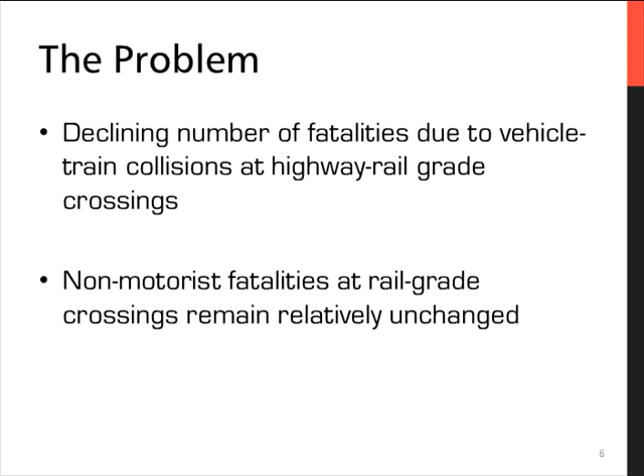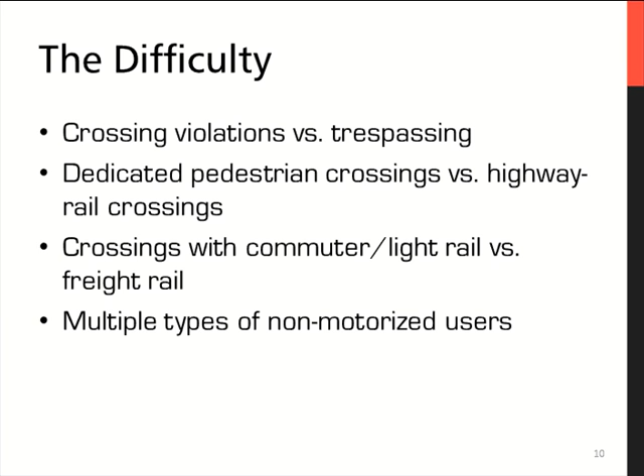There are differences in crossings that serve exclusively pedestrians versus crossings that are on sidewalks adjacent to the highway. There are also crossings that have commuter and light rail, and crossings away from urban areas or in urban areas that serve only freight rail. Also, we have multiple types of non-motorized users. We have people pushing strollers with little kids, people on skateboards, sometimes even equestrians, and of course people with disabilities. And all these different user groups would require different types of countermeasures to advance their safety.

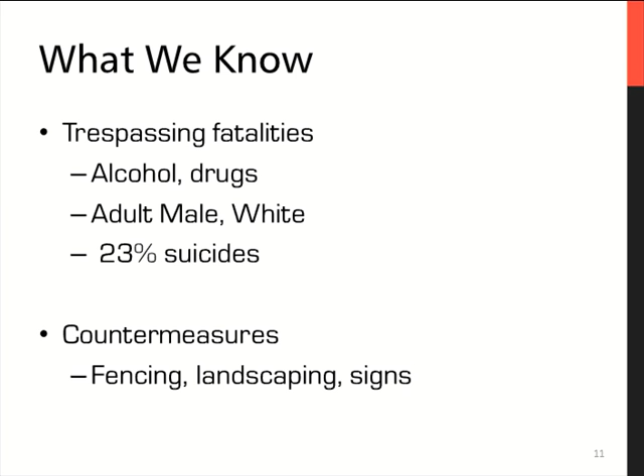What we know from the literature is that trespassing fatalities involve alcohol and drugs, more frequently involve adult males and the white population, and about a quarter of them are suicides. And as a countermeasure, we have used fencing, landscaping, and passive warning signs. As far as warning devices, we have found that active devices seem to reduce risky behavior, as measured, for example, by the elapsed time between the activation of the device and the time of arrival of the train, and also the time that the pedestrian is entering the crossing.

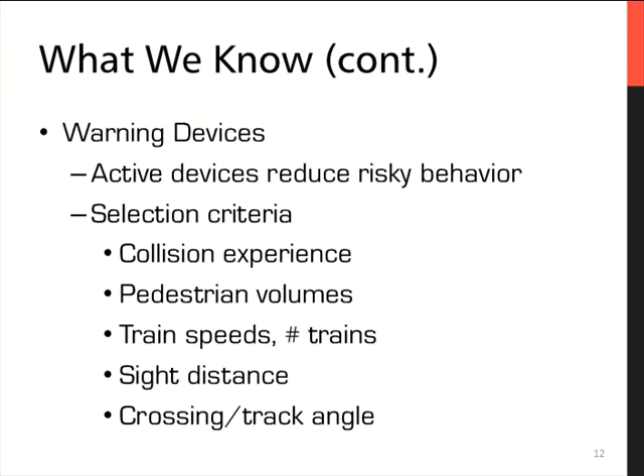For selection criteria, we have used the collision experience; for example, crossings with higher numbers of fatalities receive priority. Pedestrian volumes: crossings that are busier obviously receive priority. Crossings that allow trains to go by with higher speed obviously need more attention, and also the sight distance and the overall geometry of the crossing. All these are selection criteria that determine the type of warning device that will be installed in a particular crossing.

We also know that accessible signals for people with special needs are not commonly used at rail grade crossings for pedestrians, and we'll see some of the issues later, but there's not enough funding essentially to have these specialized signals. Intelligent grade crossings are an area that is developing. We know that with the positive train control technology deployment, that is coming not soon enough, but is coming nonetheless, there will be technologies developed specialized for pedestrians and non-motorized users, along with all the other technologies that will benefit the motorized users.

We know that we have campaigns, engineering, education, and enforcement campaigns that have certainly benefited the safety of pedestrians, and obviously a lot more has to be done to continue this trend.

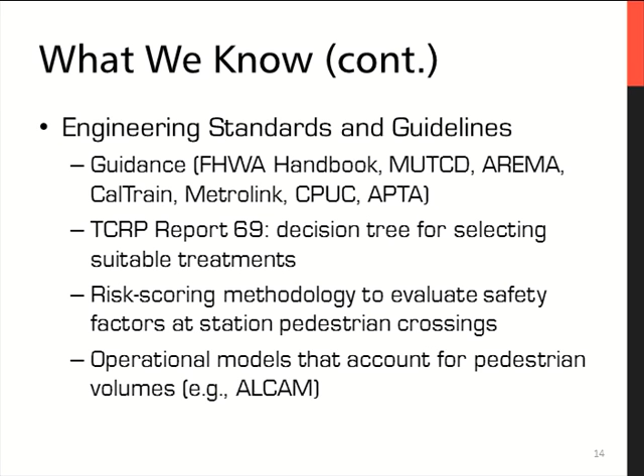What we did with the survey of experts is that we contacted about 20 or more public sector officials, close to 30, I believe, and almost 10 experts in the private sector, and asked them all these kinds of questions that we tried to aggregate into thematic areas that relate to safety at grade crossings.

So the first thing that came from the interviews is that safety upgrades at dedicated pedestrian crossings, meaning they don't serve anything else but pedestrians or non-motorized users in general, are not prioritized as highly as those at rail highway crossings. Unless, for example, sidewalks adjacent to highways are also due for an upgrade, and so crossings at that point receive upgrades both for cars and for pedestrians.

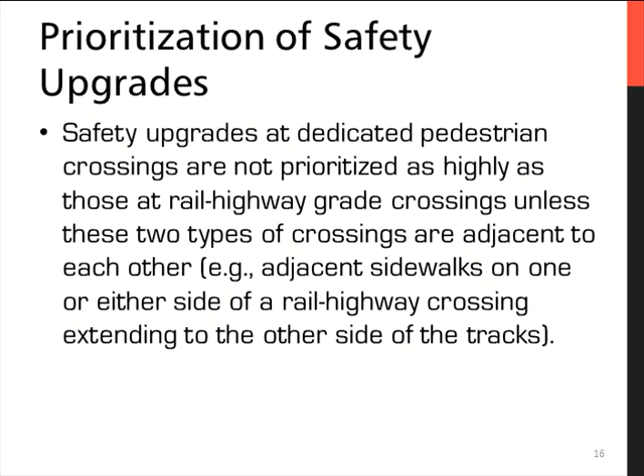As far as engineering standards, we know that states that have substantial experience with passenger, commuter, and freight operations are leading the way in developing guidelines and standards. For example, in California, both Caltrain and Metrolink have developed their own guidelines, consistent with the state MUTCD. It's an area that has received considerable attention among the states, and also an area that will require increased consistency of the standards among the different organizations responsible for this task.

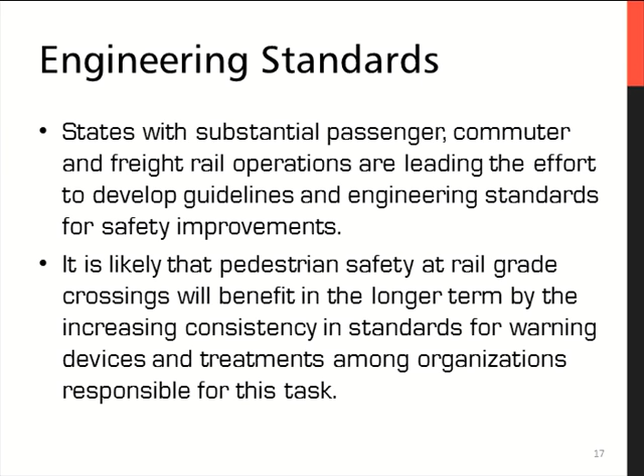Regarding cost considerations, the experts agree that information regarding cost estimates is not generally available, and there are many reasons for that. Many of these issues have been discussed at some length in the attached report, which I believe will be available for download. But it's certainly an area where the information is not readily available, and that obviously affects the cost effectiveness evaluations of safety treatment upgrades.

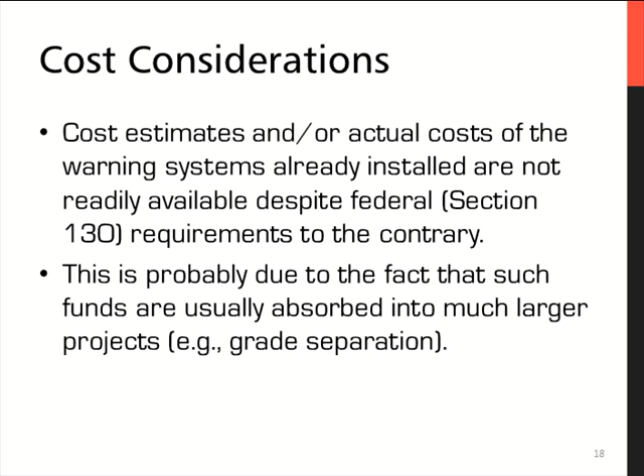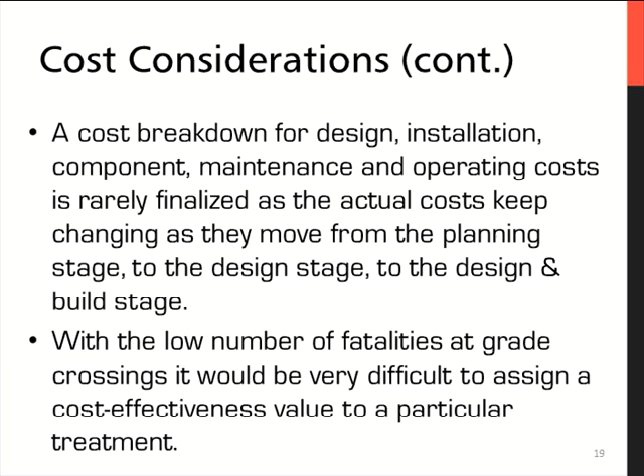And again, the breakdown, especially between design, installation, and maintenance, is difficult to come by. One of the reasons is that pedestrian fatalities are not very frequent, and so they may not justify the cost of producing safety upgrades at particular crossings. And the experts seem to agree that we need more oversight from state departments to manage targeted funding, because it's easy to lose track of where the funding goes as far as safety upgrades.

Regarding funding availability, we know that the vast majority of available funds is programmed for rail highway crossings, and very rarely exclusively dedicated to pedestrian grade crossings. The experts agree that it's important that the federal funding source included in Section 130 continues and is not rolled back in with other highway funds, so that this support continues to maintain rail expertise at the Federal Railroad Administration and the State Departments of Transportation.

Regarding selection criteria for warning devices, you have a diagnostic committee, in state utility commissions, that includes engineers and other state and local stakeholders. It's a process that happens in ad hoc fashion, but it's a consensus building exercise. We still believe that a more structured way would help that consensus building exercise arrive at the most cost-effective safety upgrades.

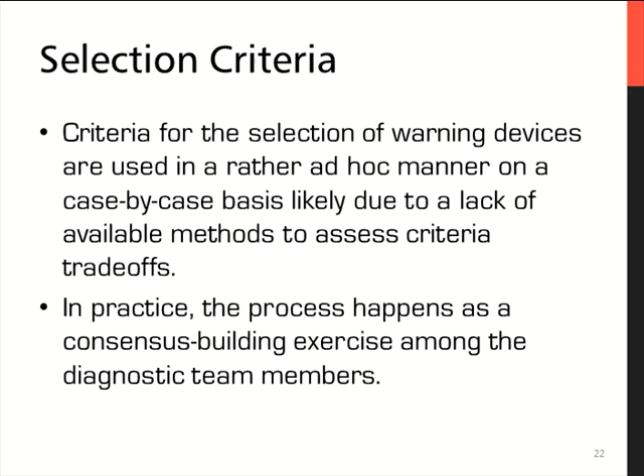Regarding accessible pedestrian signals, it seems that dedicated funding is not available for accessible pedestrian signals, and there is a lack of standardization among manufacturers, probably because of the size of the market. The market is not large enough to justify standardization.

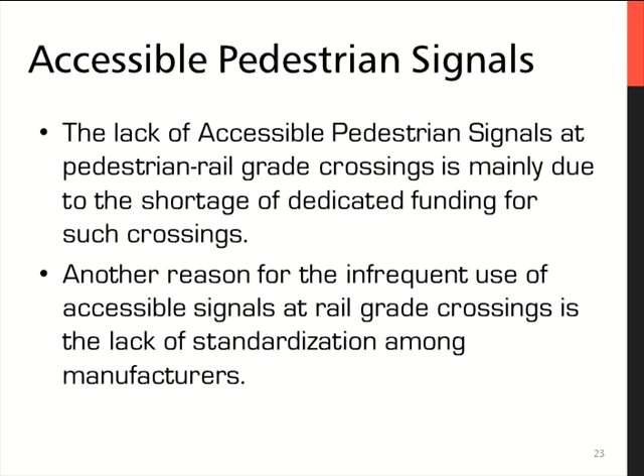For education and enforcement campaigns, we need strong local advocacy to maintain enforcement, and these campaigns should continue even after you observe improvements at one crossing; they should continue at the adjacent or next place.

And for light rail grade crossings, it seems that the active participation of transit agencies can help advance safety over this particular crossing. For risk management, this is an area that certainly can receive a lot of attention, in that we don't currently have a consistent approach for managing the risk.

And the public and private responsibilities are also an issue that needs to be considered, because the public sector is always trying to select and install the most robust safety upgrades, but the operating railroads who have to maintain them want to minimize the life cycle costs. So there is some conflict between public and private stakeholders' responsibilities.

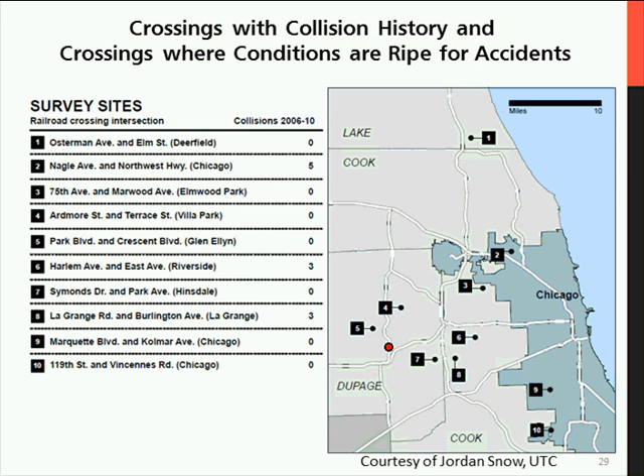The survey sites are listed, and on the right you see a map of the six-county northeastern Illinois region, and this is Lake Michigan, and this is the city of Chicago boundaries, and you see most of the sites were outside the city of Chicago. Three of them were located right in the city of Chicago, one on the north side and two on the south side, and most of the others were located in the western suburbs.

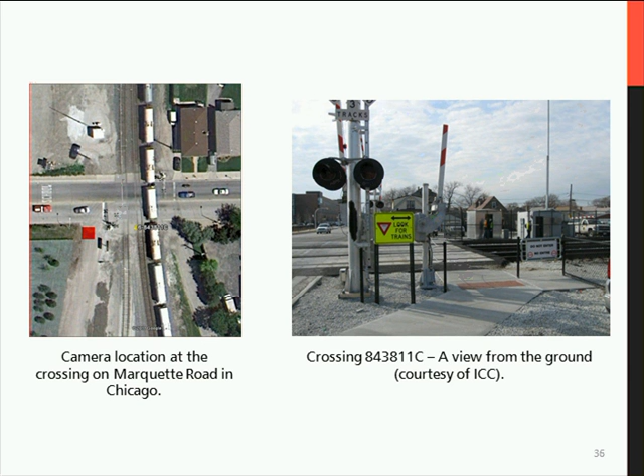This also assumed significance not because of the freight-only operation, but because this was right adjacent to a school. And that presented some uniqueness to it, and that's why we were commissioned to study this also. And by the time we were done with the other sites, we were able to get back to this site when the construction had been completed, the sidewalk had been opened up, and the pedestrian gates were installed. And so that allowed us to take a look at how that was being put to use.

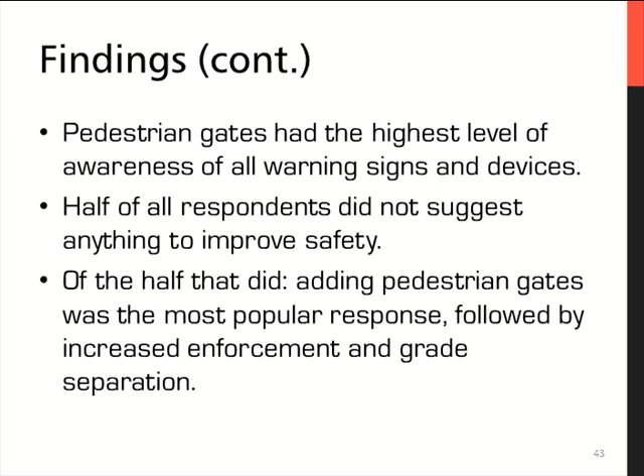And then the next issues that were brought up in the survey were increased enforcement and grade separation. Of course, increased enforcement can be done with a little bit more funding, but grade separation is a totally different scale altogether.

People that use the crossing environment regularly appear to have awareness of signs and warning devices, which is also somewhat understandable. You are using the crossing at some point in time, you're going to notice what is around you. And so that seemed to be reinforcing what the literature said. They also were more safety conscious because they were using the crossing on a regular basis.

And not very coincidentally, female respondents to the survey appear to be more safety conscious, which is fairly consistent with all the other findings that you see in public transportation. Women in general have a greater perception, or attribute a greater importance to perception of safety and safety issues when it comes to using public transportation, and that trend seems to be reflected in this group.

That was surveyed. Younger males, not coincidentally, appear to be the only group that are more likely to cross the tracks against activated signals and warning devices.

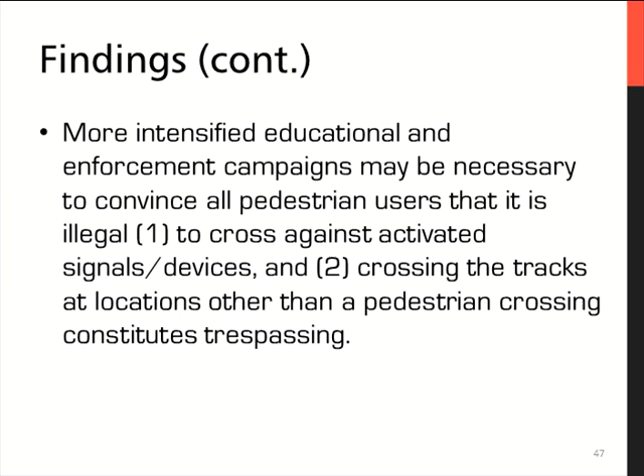As far as the respondents to the survey, they admitted a higher violation propensity at grade crossings where only passenger rail was in operation. That may also reflect the frequency issue, and then maybe they could be lulled into a false sense of security because there's only trains operating every so many minutes or every so many hours.

Then you have, following that, crossings with freight-only operations, and lastly, the shared corridors where crossings have both passenger and freight operations. Then you have a lot of violations.

We also did a video monitoring of non-motorized users. This video was mounted next to the crossing environment at a height of about 25 feet or so, using a very customized camera that's being used nowadays to capture traffic movement and count cars. We put this up for a period of 24 hours or so at every crossing location, and then enumerated and cataloged the behavior that was observed through these videos.

And then what we found was that pedestrians who took the most risk, ignoring the gates, they had to scamper across.

They had to hurry to cross the crossing environment. This behavior also relates to violations: if you were in a group, you tended to commit a violation even when the activated devices were in operation, more so than when you were by yourself. That group mentality seems to have an impact on violations.

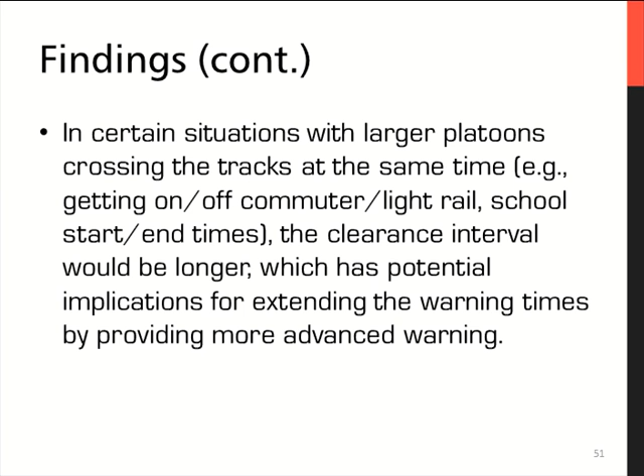This also brings us to an important finding: in a group setting, speeds are lower for the group, which means the clearance interval would be longer. Then the need for extending the warning times becomes more critical. That needs to be taken into account by the authorities, especially when you have large groups of people disembarking or boarding a train, either in the morning or afternoon peak, especially on heavy commuter corridors.

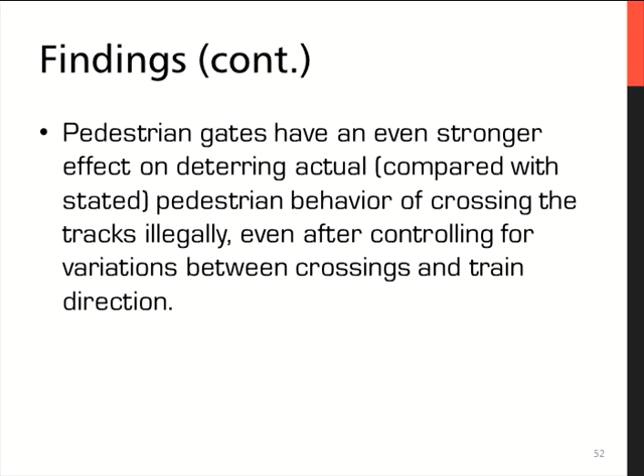The gates have a strong deterring effect, which has been shown from the videos also. Even after you control for variations between the crossings and train direction and all that, you see that the gates are most effective. So those were some of the broad findings, and as far as conclusions are concerned, these are nothing out of the ordinary.

We do say there's a need for consistency in terms of engineering standards. There are issues looming on the horizon with high-speed rail coming up in multiple states, which will require re-education of pedestrian users. It's increasingly important to better track the programming, which we found sorely lacking, because it's always combined with highway expenditure and highway improvements to a crossing, so there's no way to separate out how much improvements cost for improving the pedestrian environment in a crossing. Unless you do that, you cannot find out how effective your treatments have been compared to the cost. So that is something that needs to happen.

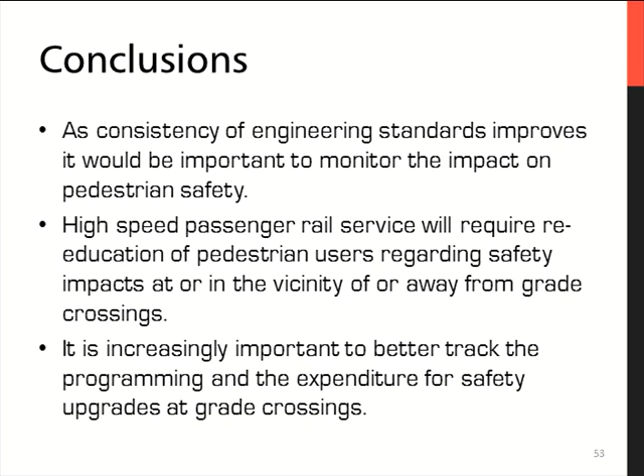I know there are operational difficulties in order to make it happen, but at least there is consensus amongst the people we talked to that while it is difficult, it needs to happen. That brings me to the cost effectiveness aspect I mentioned. In order to have that, you need to have the cost separated out so that you can clearly identify what are the benefits versus the cost.

There needs to be continued funding. Currently there isn't any dedicated funding, especially when it comes to the pedestrian aspect of things. Of course, all of this would be moot if you do not have a consistent risk management approach that supports all aspects of safety upgrades at pedestrian grade crossings.

So those are some of our very broad findings, and I know we sacrificed a lot of the detail, but I would welcome everyone to take a look at the report because there's a lot more interesting information in it. Thank you for giving us the time and the opportunity.